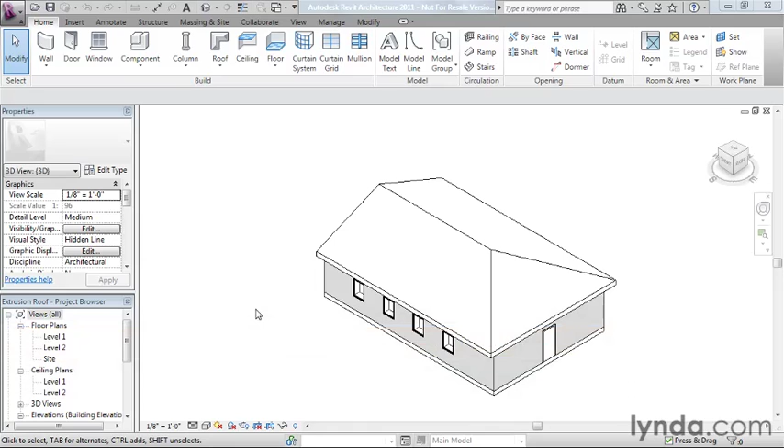Let's take a look at a simple extrusion roof in this data set. To create an extrusion roof, we actually work in a plane other than plan view. I'm looking at a three-dimensional view, and I'll hold down my shift key and drag with my wheel to spin this around. I have this little exit way over here. Let's assume the designer wanted to put a covering over that, but also have a little fun with it and make it something freeform. This is where we might choose to do an extrusion roof.

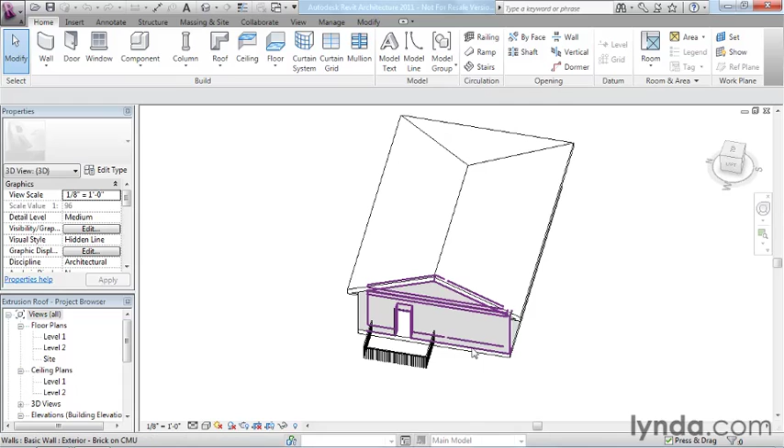To draw this extrusion roof, we're actually going to work on the surface of the wall. So the wall that I have pre-highlighted, we need to work on that surface rather than a floor plan view. I could work directly in 3D, but it's actually going to be a lot more convenient to work in elevation. So this is the west elevation, and I'll zoom in on the wall in question.

Let's go ahead and start an extrusion roof. To get there, we use the drop-down portion of the roof button and then do roof by extrusion. The first thing Revit will say is, since we're not working in a floor plan anymore, we need to do a sketch. This is a sketch-based object, so it asks: what plane do you want to do your sketching in? Remember, they're just two-dimensional, so they only work on 2D planes.

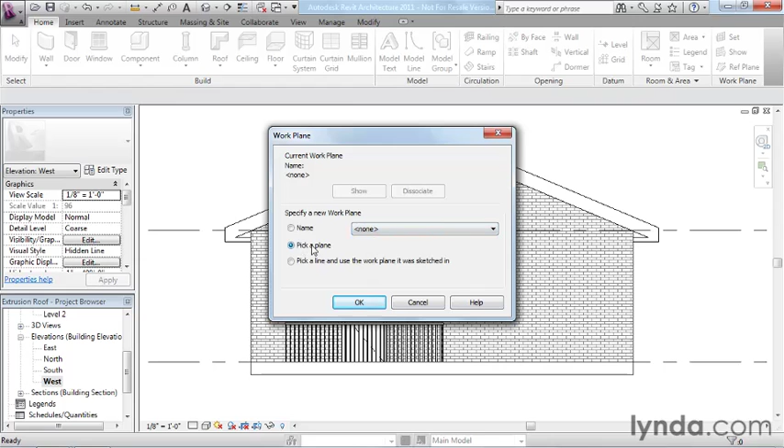So we need to indicate a plane somewhere to do our sketching. If we had a plane predefined, we could choose it off the list, but there's no choices there, so that's not going to work. So let's go with what it's offering us and choose pick a plane. When you do that, you can move your mouse around on screen and see how it'll highlight pretty much any geometry. I want to highlight that wall right there, basically telling Revit I'm going to work on that surface of that wall.

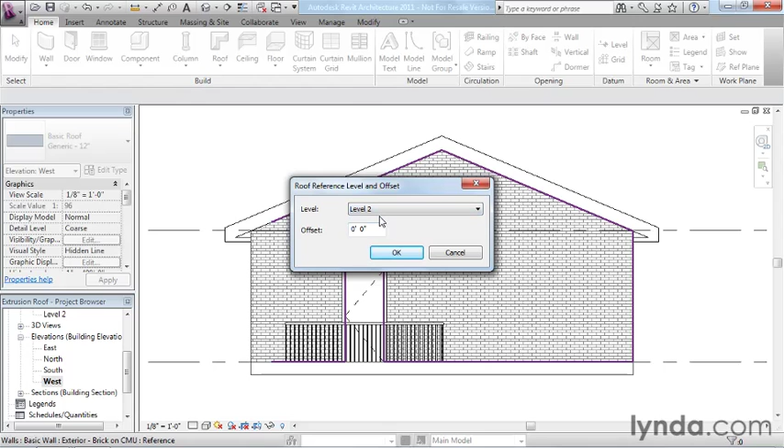The next question is: that's the surface you want to draw on, but what about the height of the roof? What level should I associate it with? It automatically suggests your top level, and in this project there's only level 1 and level 2, so that ought to do the trick. I'll go ahead and click OK. So next, I'm in sketch mode.

Again, everything grays out, and unlike our footprint roof that we saw in the Adding Roofs movie, we don't have any pick walls in this case because we're not working in plan view and we're doing an extrusion. So we just draw the shape.

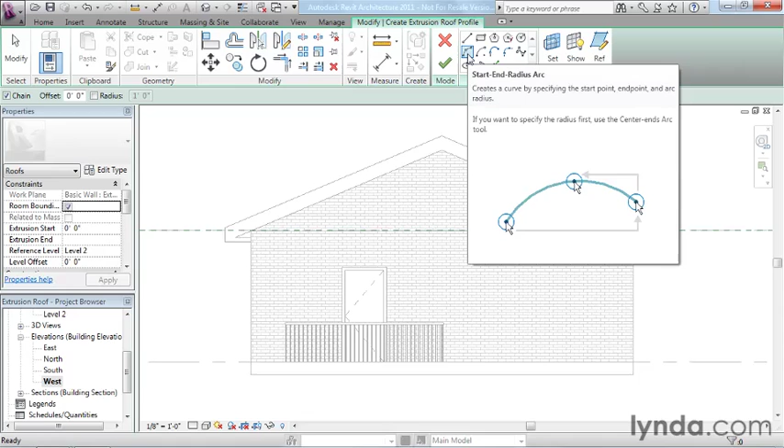We can draw any shape we like, but let's have some fun with this, and let's also look at an arc in Revit for the first time. Drawing arcs works pretty much the same way no matter what tool we're working in, so even though we're doing it here in the context of a roof, you can use the same technique for any kind of arc shape. Basically, you click anywhere for your starting point, then anywhere for your ending point, and you'll see the arc appear. Your next click determines essentially the radius, somewhere along the curvature of the arc, and that gives you the radius.

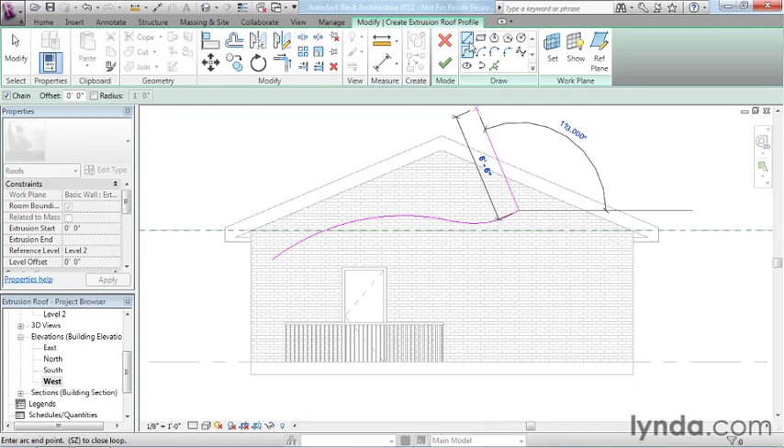You could stop here with just that single curve, or create a second curve, and notice Revit will even look for things like tangential relationships. You could switch to lines and draw additional shapes starting at that end point, maybe going out horizontal, whatever you want to do. So just to show you it doesn't have to be just one shape, it can actually be multiple shapes.

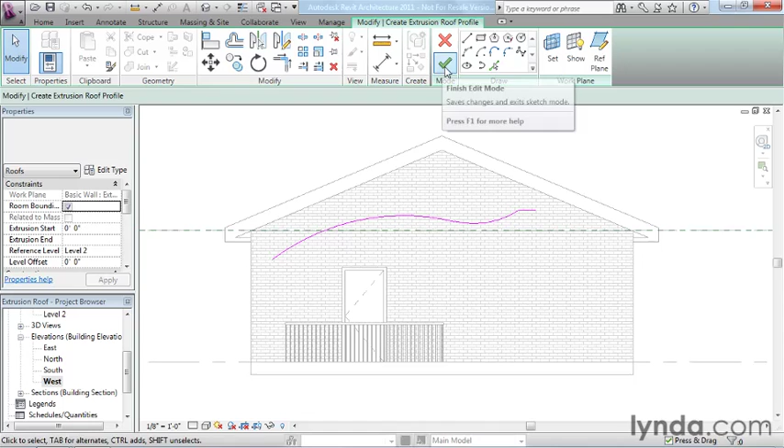The thing that's very different about this sketch versus the floor sketch or the footprint roof sketch we've looked at previously is that this sketch is not closed. Don't draw it around to make the total form - that will generate an error. So you want to leave it open-ended like it is now. When I click Finish, you see how the thickness gets applied anyway - that's because I'm using the generic 12-inch roof, so the 12 inches gets determined by the thickness of the roof material. That's why we didn't need to sketch that.

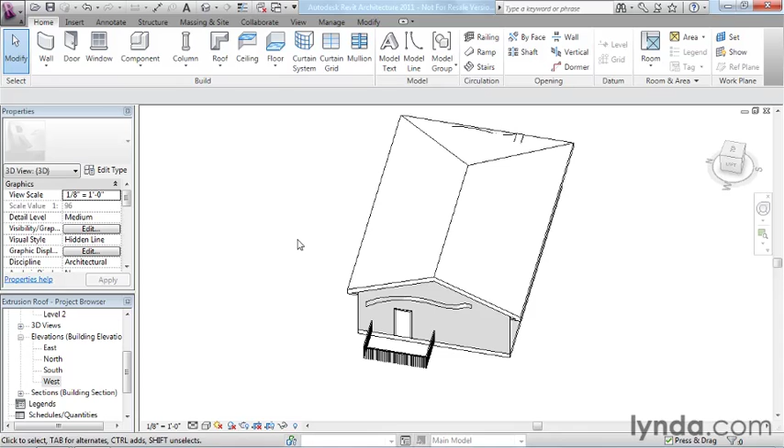Now it looks a little odd here, and it's a little easier to understand in 3D view. I'm not really sure why Revit always does this, but it always goes the depth of your building - it just has to assume something rather than ask us another question. In my opinion, they always assume poorly, because I always have to come over here and select this and make adjustments. Now I can do this manually with these little control handles at the end.

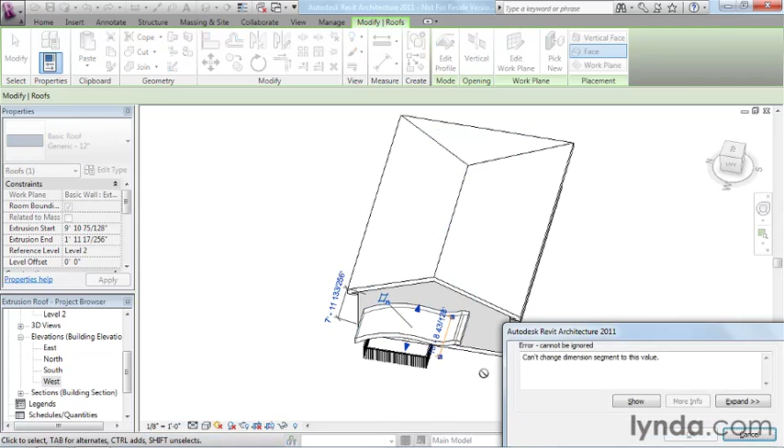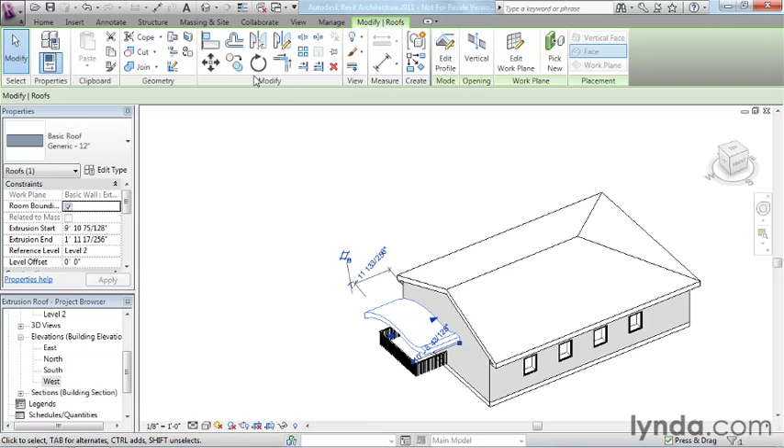I can type in numbers, make that 55 feet. I can pull this one all the way out here, make that 10 feet. Whoops - I guess that's not a good value. Let me spin this around. If I can get it to a good angle, this may actually be the design you want, where it sits away from the building, maybe held up by some structure. But if you want it to actually attach to the building, we can use our Align tool for that.

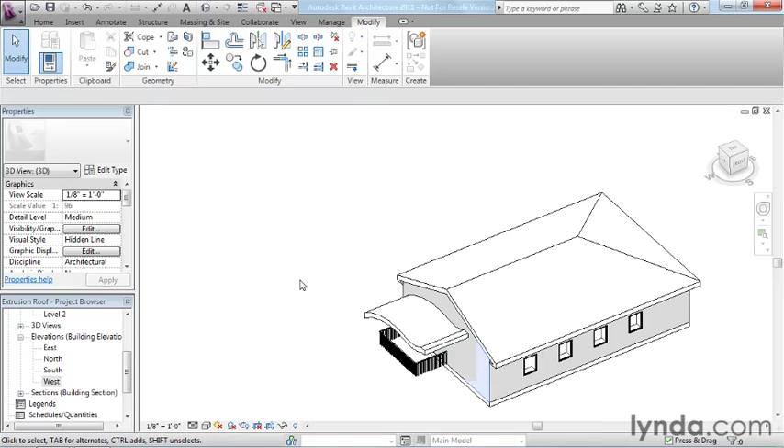I'm going to go to Align, and what's really neat about Align is it actually works here in 3D. I'll click the face of the wall, and then it lets me highlight the face of the roof object, and it will just stretch that for me. So instead of struggling with the grips, Align does a much better job. So there you have it - that's an extrusion roof. You can use it for any similar type shape, barrel vaults or undulating forms like this - just a simple sketch, and you're good to go.